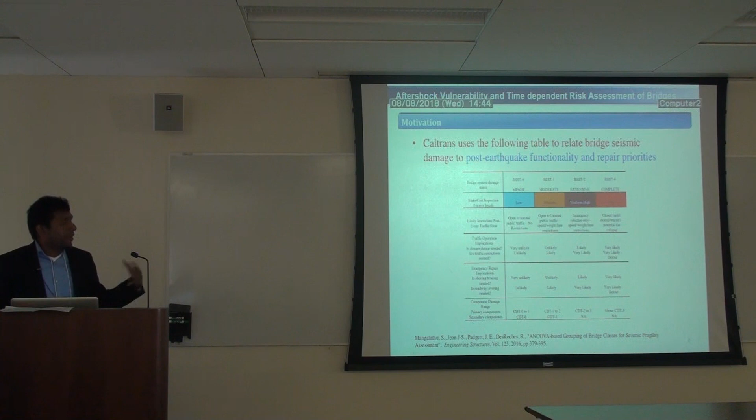The motivation comes from the post-earthquake functionality and repair implications. Currently, Caltrans or HAZUS has 4 damage states: minor, moderate, extensive, and complete, with some qualitative descriptions associated with these damage states. These descriptions come from the post-event traffic state of the bridge, traffic operation implications, or emergency repair implications. However, time is not a factor in this chart.

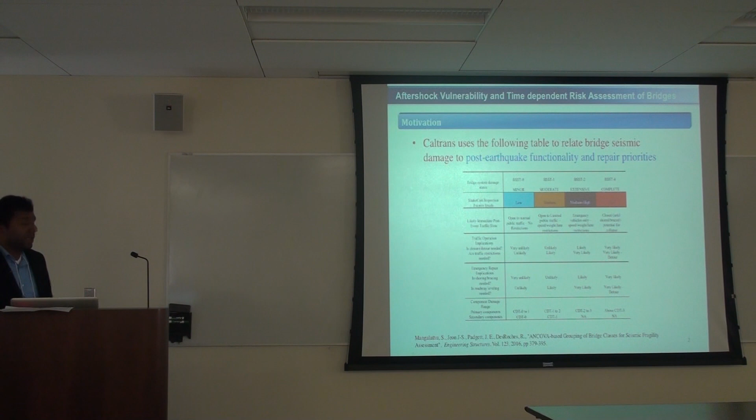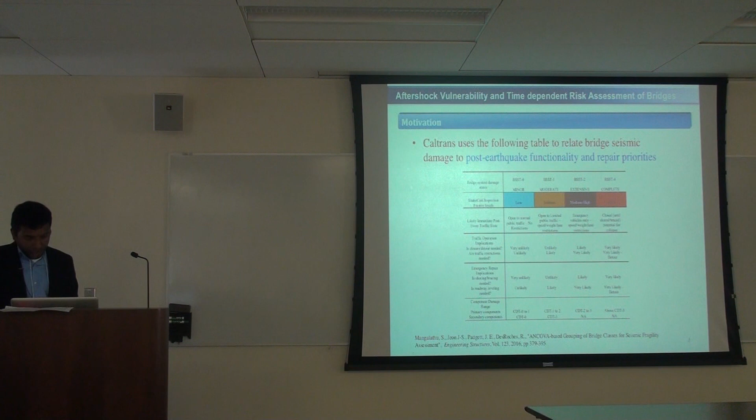After an earthquake, inspectors will go and inspect the bridge, and based on the damage on the components such as column, bearing, or abutments, they classify the bridge into minor, moderate, extensive, or complete. That is good, it will give us a lot of information from the field observation of the bridge and classifying the bridge into various damage states.

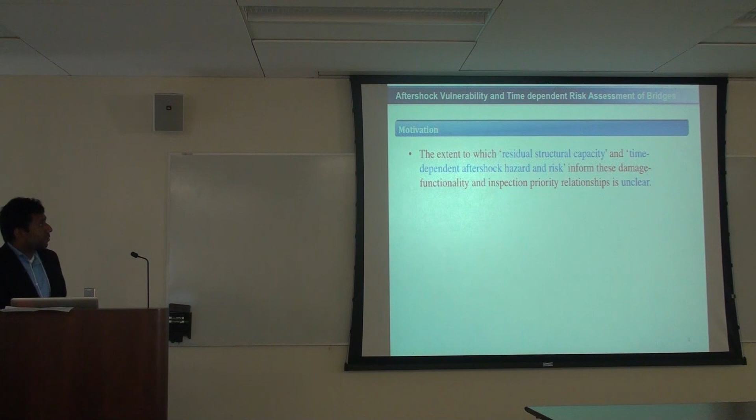But the extent to which the residual structural capacity and time-dependent aftershock hazard and risk affect this bridge's functionality is not clear.

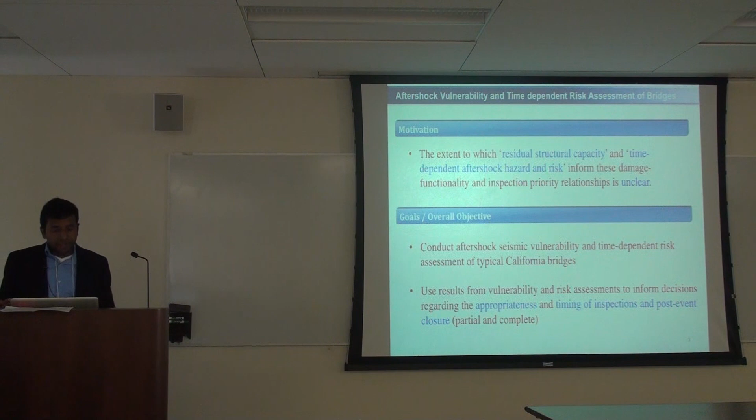So the objective of this work is to conduct aftershock seismic vulnerability and time-dependent risk assessment of typical California bridges. Contrary to my study at Georgia Tech, here I am trying to generate a framework for the aftershock seismic vulnerability and time-dependent risk. We can use these results to inform decisions regarding the timing of inspections and the closure of bridges.

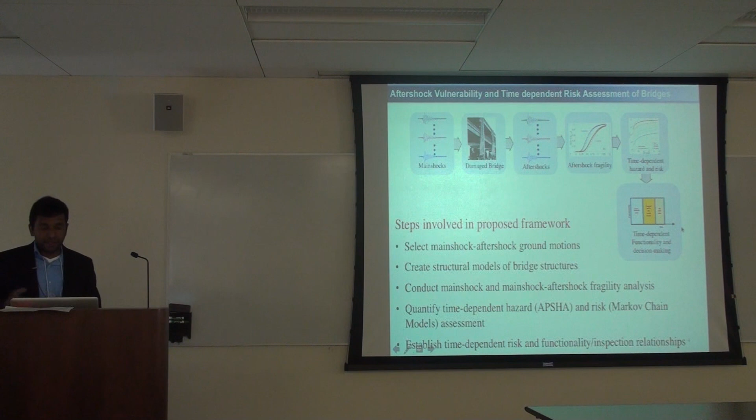So the final goal or deliverable from this project is some time-dependent functionality and decision-making charts. We can say for this much time the bridge should be in a closure state, or what is the state of the bridge, whether it can allow emergency traffic or whether it can allow public traffic after an earthquake.

But this framework involves a lot of steps. We have to select some main shock and aftershock ground motions, and create some finite element model of the bridge in OpenSees. Once we have the model and the earthquake ground motions, we conduct some main shock and aftershock fragility analysis. After that, we quantify time-dependent hazard and risk using a Markov chain framework, and finally establish the time-dependent risk and functionality or inspection relationships.

So regarding the selection of ground motions: Jack Baker, as a part of the framework, selected some ground motions, but our focus is on selecting the main shock and aftershock records. If we look at past studies, there is some non-negligible difference in the frequency content between the main shock and aftershock. So we are trying to use the actual main shock and aftershock from the NGA-West2 database.

And since the bridge is already in a damaged state, we are planning to generate the fragility curve using a stripe approach. The traditional fragility analysis of a bridge is carried out using a cloud approach: you apply some selected ground motions, run the nonlinear time history analysis, and once you have the result, you plot the demand and the intensity measure in a logarithmic space.

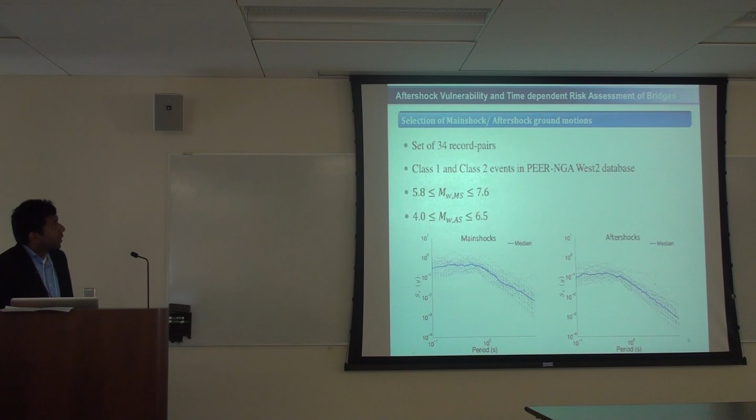Based on my study at Georgia Tech, I found that the average period of highway bridges in California is close to 1 second. Based on epsilon criteria and the recorded ground motions in the NGA-West2 database, we selected the main shocks and aftershocks, resulting in 34 pairs of main shock and aftershock ground motions.

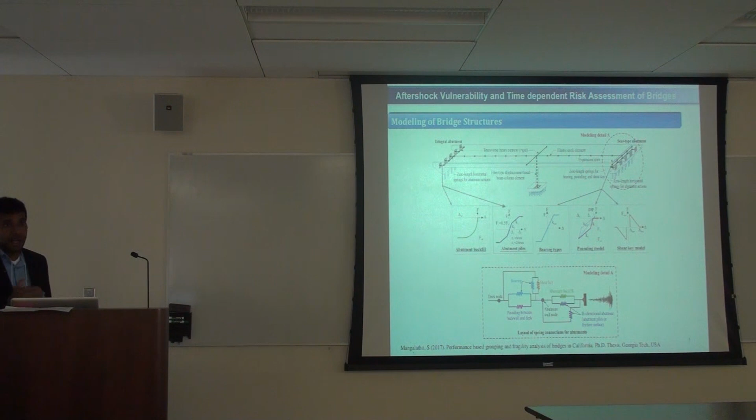This is how we are modeling the bridge. We are trying to model the bridge in as much detail as possible. We are not expecting any damage to the deck, so the deck is modeled as an elastic element. For column modeling, we are using a fiber type displacement based beam column element.

For modeling the abutments, we are essentially using springs. For the abutment, we use a model suggested by Shamsabadi, and the pile modeling comes from the recommendations of Tom Shantz. For the bearing, we use experimental results to model it. Pounding is modeled using a model developed by DesRoches and his group some years back. For the shear key model, we get the model from experimental results by Mangalathu.

This is the connection of the springs at the abutments. We connect bearing and pounding in parallel, and they connect in series with the abutment backfill. So we are trying to get the response of almost every component in the bridge.

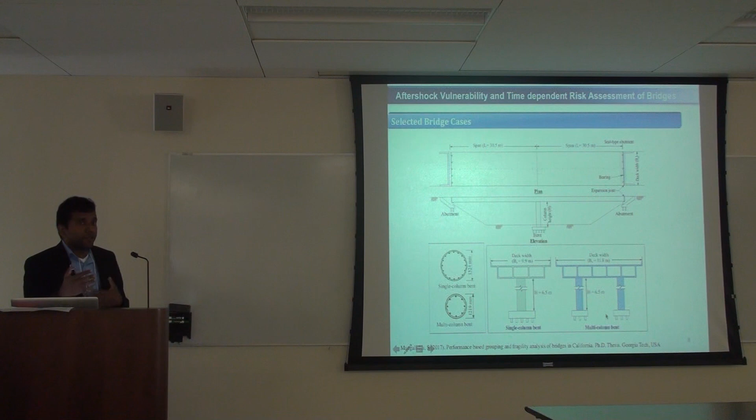This is a selected case study bridge for our study. Our focus is on highway bridges, so we are selecting a 2-span highway bridge with a single column and a multi-column bent. These come from the plan review of bridges in California. The details of this abutment modeling and the selection of bridges are presented in my thesis at Georgia Tech.

Now we are going to the aftershock fragility. If the bridge is damaged to a specific damage state, aftershock fragility is the probability that the damage will exceed a specific level of damage given an aftershock intensity measure.

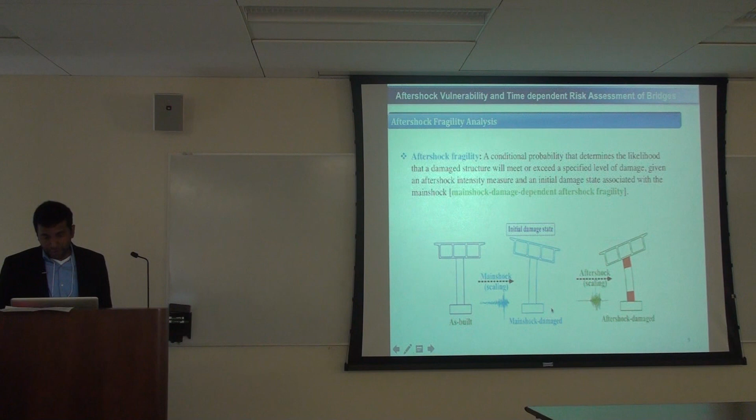So the bridge is built. We apply the main shock by scaling it, targeting a specific damage state for the bridge. Once the bridge is damaged to a specific damage state, we apply an aftershock and generate the aftershock fragility of the bridges. This is the aftershock fragility after damaging the bridge to a slight damage state.

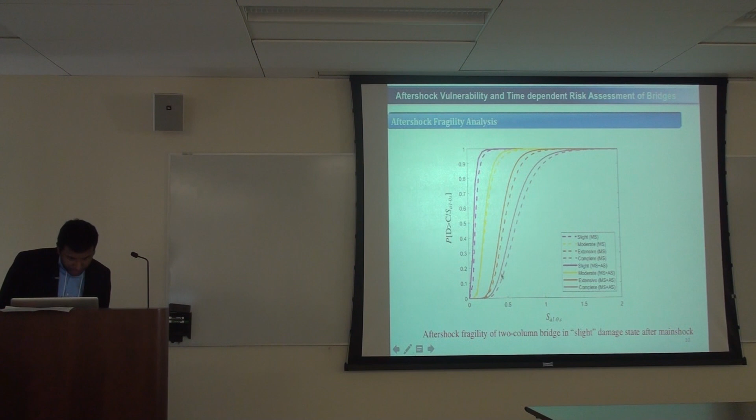Since the bridge is already damaged, applying another aftershock will increase the seismic vulnerability of the bridges. Here the dotted lines correspond to the fragility with only main shock, and the solid lines correspond to the main shock plus aftershock fragility.

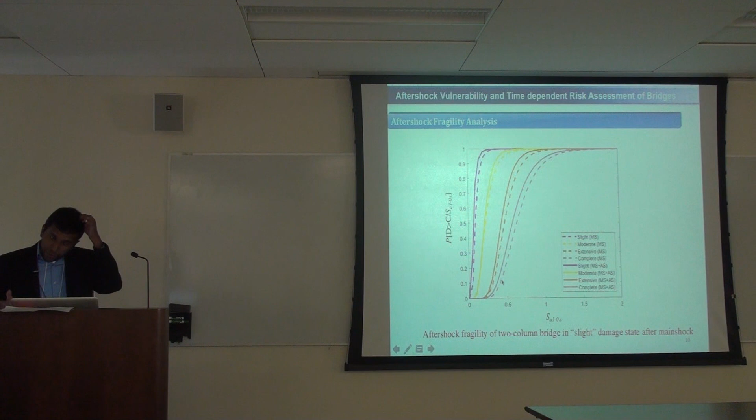Once we have aftershock fragility for all the damage states, we employed a Markovian framework to estimate the limit state transition probability. For example, what is the probability that the bridge stays in a specific limit state if the bridge is damaged to slight? With time, the probability that the bridge stays in slight damage decreases because the bridge is already in the slight damage state.

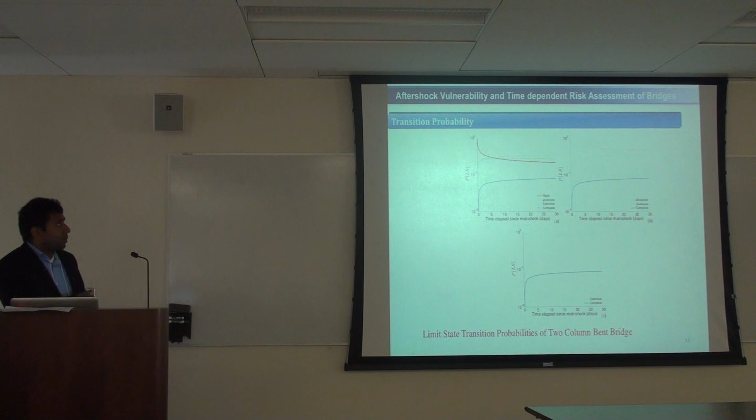However, the probability that the bridge goes from slight to a higher damage state increases with time. This is because there is a high probability of an aftershock after a main shock event. So if a main shock is coming, and an aftershock comes after the main shock, the probability that the bridge stays in a specific limit state decreases.

Here we are showing the curve for the bridge that is damaged to a moderate damage state, and what is the probability that the bridge will go to the extensive or complete damage state with time.

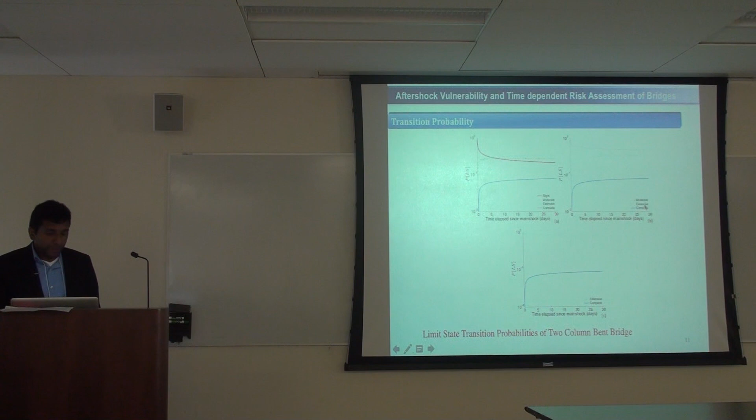So the ongoing research direction is we are doing some aftershock seismic hazard analysis to quantify the time-dependent risk, specifically whether the scaling of the main shock has an influence on the aftershock fragility. We are doing some investigations there.

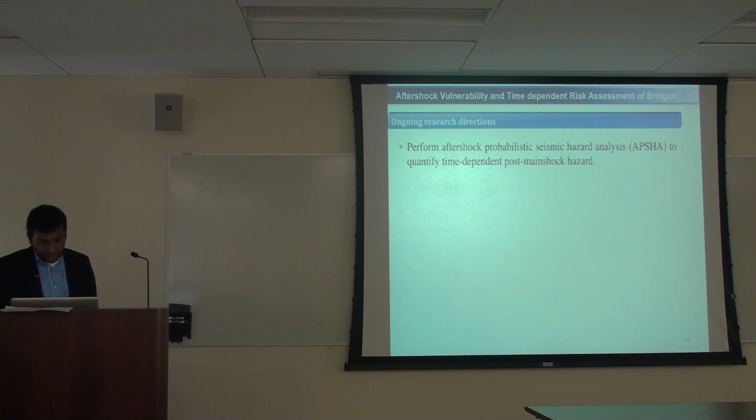So we are implementing the Markov chain that integrates the hazard curve and main shock damage-dependent fragility to quantify the time-dependent risk. With these results, we are planning to propose some charts that can be used by Caltrans to make time-dependent risk outcomes to inform bridge functionality and inspection priority.

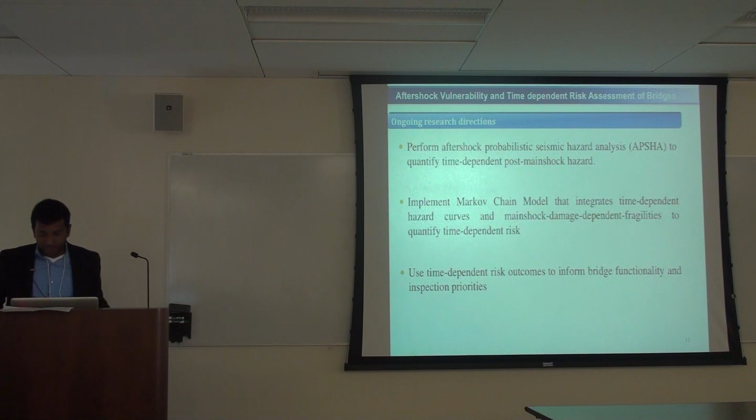Did you do the soil at all? Yes. Which soil, foundation soil or abutment soil? We considered both. Did you consider doing a suite of springs? Yes, so what happens to one spring is not affected by what happens to the other.

And can you make that bigger? Yes.

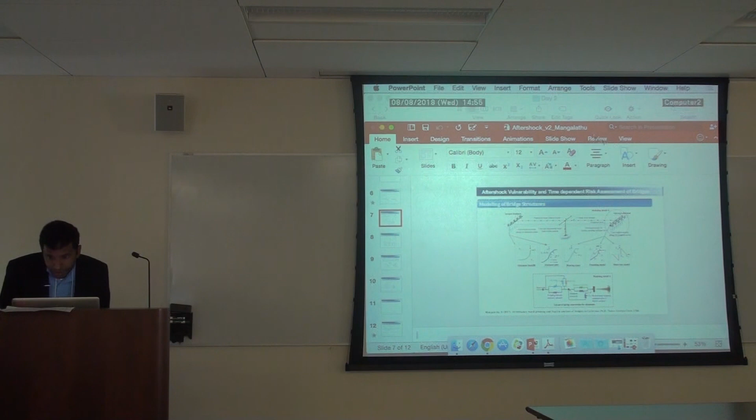Okay. So what is your question?

So your input motion goes into where? The input motion goes to whichever nodes are fixed in OpenSees. So if the foundation is fixed, yeah, the foundation is. It's the same motion that goes before, yes.

So I imagine one level more that you can go into is to add to this model the presence of the soil layers. Because you may have, on one end, a little pile of soil, so it's softer on one end.

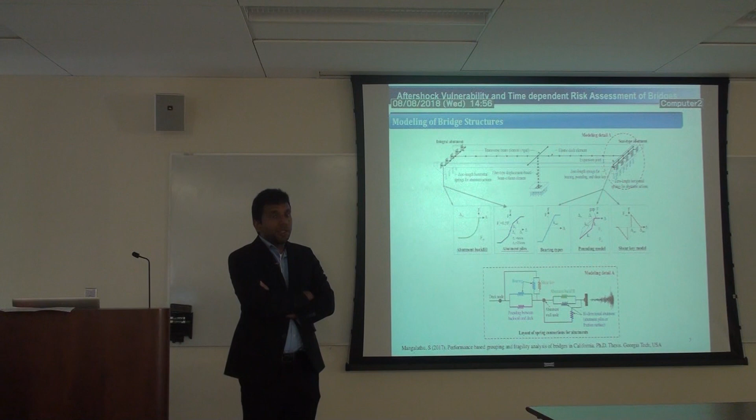No, soil at abutments or soil at foundation? Which one are you saying? Soil layer at the abutment or soil layer at the foundation? But the abutment backfill, they have the same soil, right?

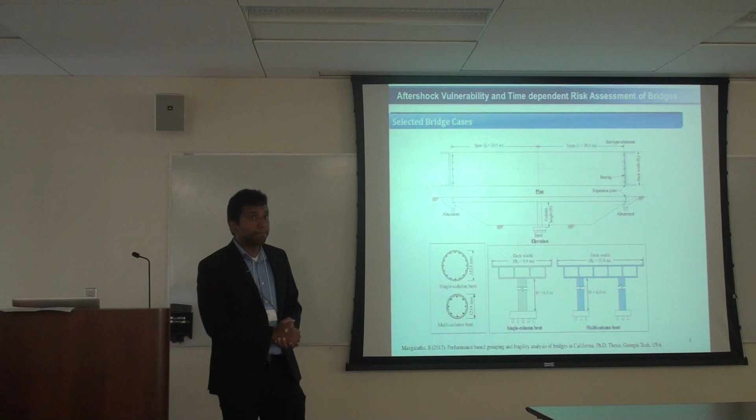But the abutment soil then continues down, because that abutment soil is usually a backfill granular material, and it continues below with the natural soil conditions. And the natural soil conditions are where you have your piles. Yeah, that makes life more complicated. You may have a soft material there.

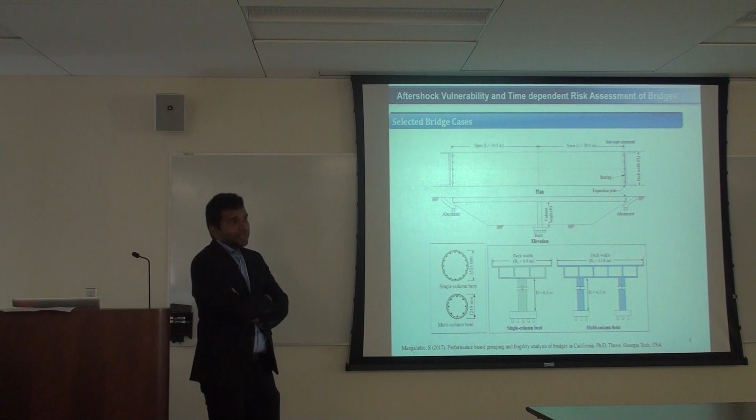But the real issue here is that for the vast majority of bridges, the real failure mechanisms and damage states are really all out of the column. And the soil springs and everything else in this model are really just designed to have the right loading for that.

Absolutely, and you could definitely go that route and expand the damage mechanisms into more soil-related things. And the foundation is very stiff, so basically we are modeling the foundation as a linear element.

So what I am concerned about is that you have the abutments and the soil and everything, and one part of the soil moves in such a way that it affects what happens in the pile that is 200 meters on the other end. So the demand on your columns, not in the foundation—your demand on the columns are not what you would expect to happen.

What Pedro is asking is whether the foundation input motion is different at the level of the pile shaft than at the abutments. Makris has transfer functions to alter the foundation motion of the pile. But then OpenSees does not have the capability to differentiate the motion. No.

Yeah, that's a possible line of complicated expansion. We'll try—you can do multi-support excitation. Now we have the capability to do multi-support excitation in OpenSees. There's a paper by Makris and Jian Zhang who has that transfer function, but in this research we didn't use that. We will try to incorporate that.

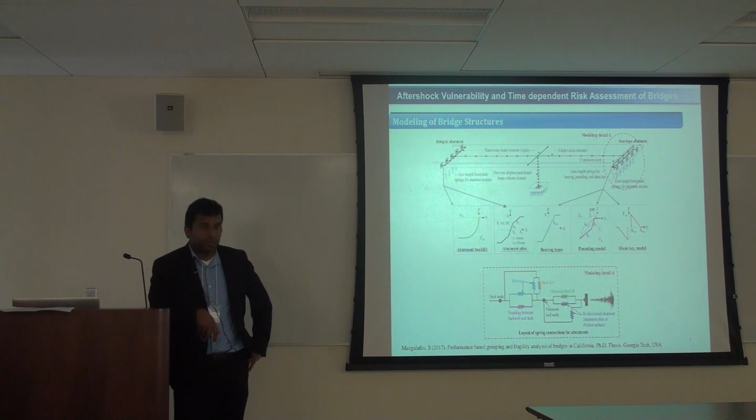Yeah, at Georgia Tech I did some curved bridges, so we have that kind of issue, but the model is capable of doing that. But our focus here is kind of different.

So you're only focusing on this type of bridge, because about 40% of California bridges are two-span, and our focus, since it's only a one-year project, is on very discrete tasks, and it seems like you've got it relatively under control.

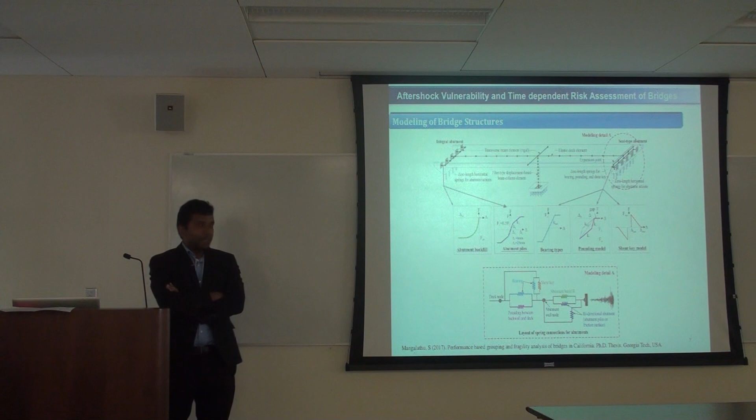Well, if people think this study is worthwhile, next year there could be more types of bridges to look at, and you can extrapolate from here. But once we get this one perfect, then we can push further, because as he said, there are very few studies that have looked at aftershock risk after the main shock, and time-dependent risk.

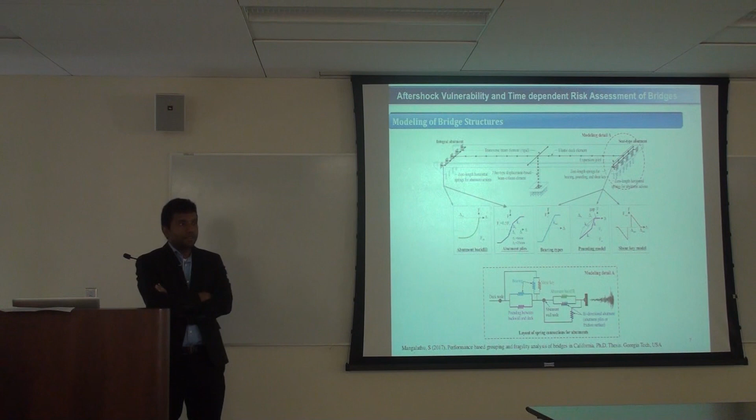Any other comments, questions? He will not be here—he's going to the airport. Yeah, that is why I cut my presentation short.

Don't leave any questions for the open discussion, please. The aftershock issue is very important, because we have bridges that survive earthquakes—whether it's an aftershock now or in two years, it's still an aftershock, and the soil or the structures have already been subjected to prior shaking.

So I guess most of the questions were about the structural model, but how about the selection of the aftershock? Any comments on that? Because there could also be a variety of these things. Yeah, there's no magic—are they doing the right thing?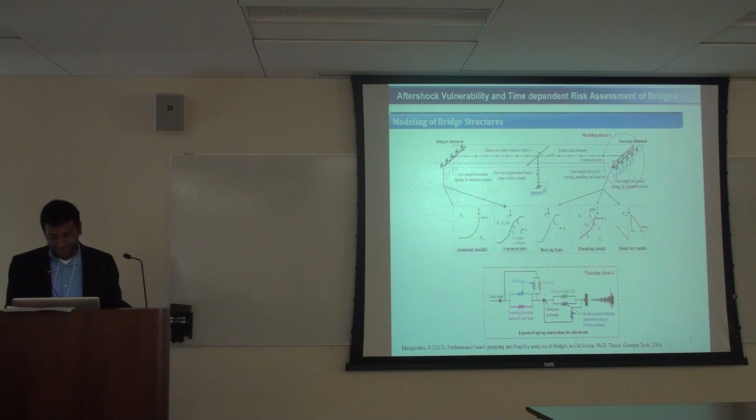Have you seen his work at UIUC? No, not yet.

Paolo Gardoni never stops shocking me—he always finds new topics to work on.

Anyway, maybe that's good feedback. Since your focus is on the selection of these time series, it would be good to see what others are doing, at least on the simulation side.

Last chance for any feedback for him? No?

So Frank, multi-support excitation in OpenSees work, right? Yeah—you weren't here when that was mentioned. We can do multi-support excitation. Okay, well, thank you very much.